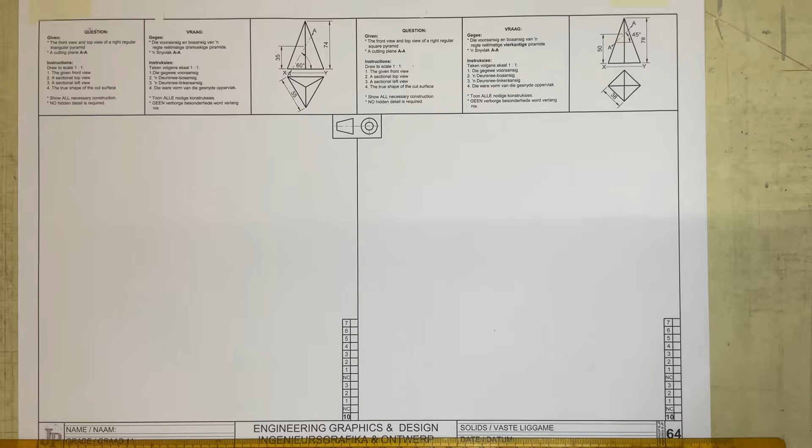All right, we're going to be doing the solid geometry here of this page number 64. What we're going to do is to first of all copy out these two views, and to do that I first of all need to do some planning. It says drawn to scale 1:1.

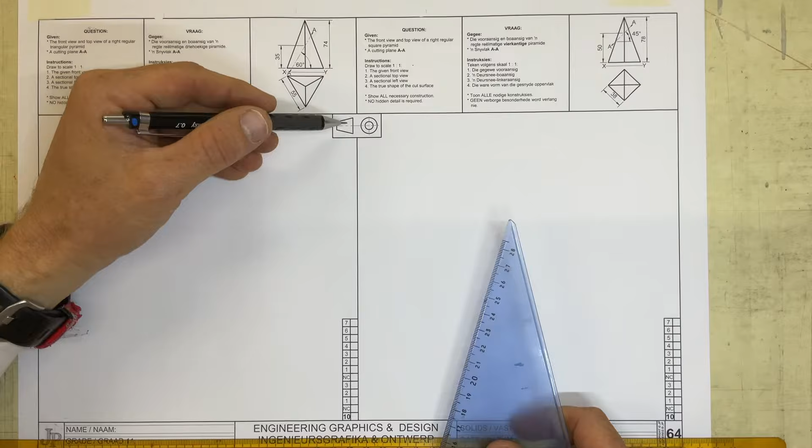I need to draw the given front view, a sectional top view, a sectional left view, and the true shape of the cut surface. All right, it is needing to be done as a first angle orthographic projection. So I need a front view, a top view, space for a left view, and space for a true shape. Right.

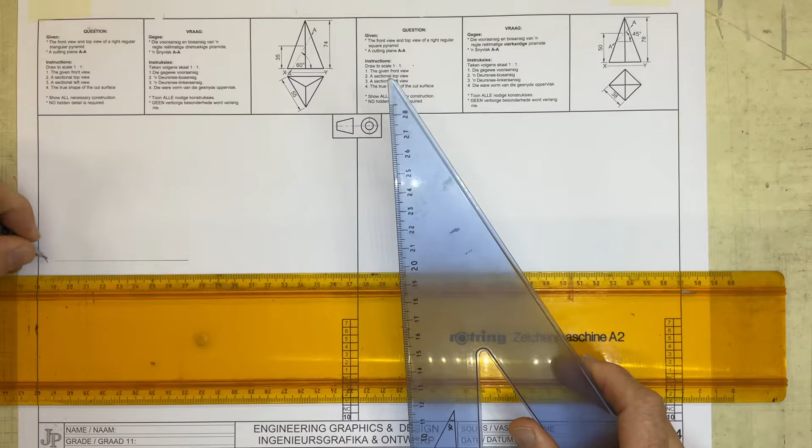Starting over here, I'm going to draw an XY axis over here, just somewhere over here, little XY axis coming across, label it with an X and a Y. I then come in over here about 5-10 millimeters away from there, and I'm going to draw a construction line coming across over there. I'm going to measure off the 55 millimeters. It's an equilateral triangle, so 55 millimeters. Measure that off over here, 55.

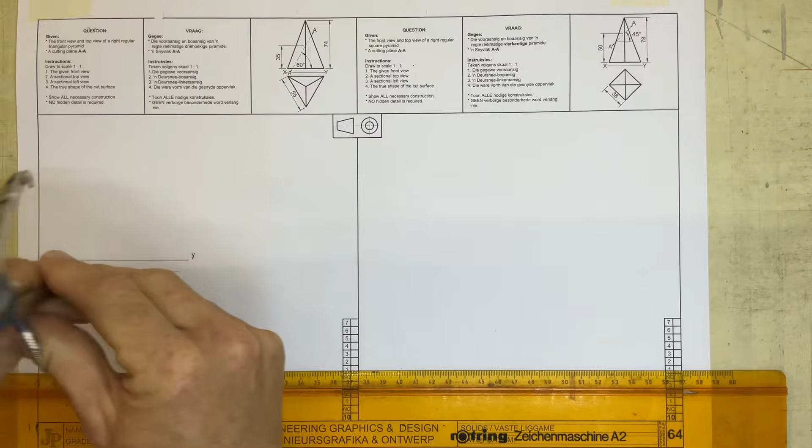I can, if I want to, draw an arc and an arc coming around here, because it'll help me just to locate that point more easily. I can draw in the outside of this thing in construction lines. Please do not draw this in dark straight away, because parts of it are going to be cut away when we do a sectional top view of it. So just in construction lines, I'm using colored pencils to do these construction lines over here.

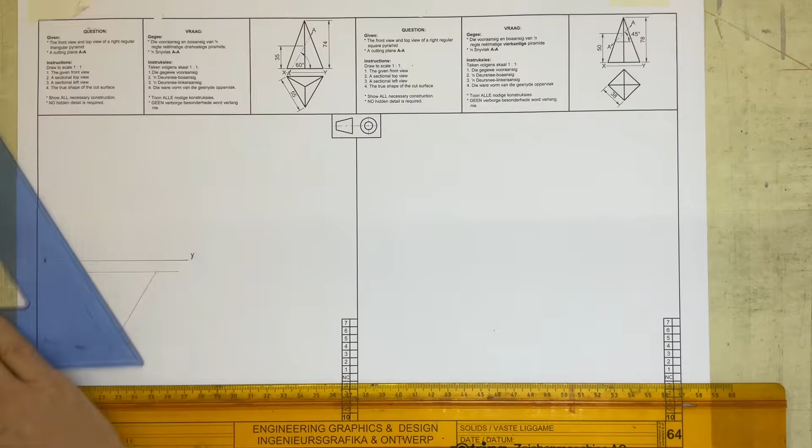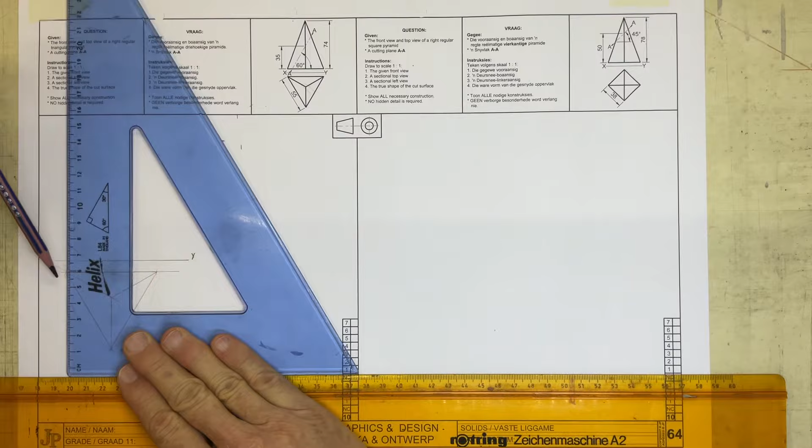Once I've got that, I need to find the apex of this triangular pyramid. I'm going to take a line coming across at 30 degrees over here, take this down at 30 degrees over here, and obviously that 90 degrees going up over there. You take that up into this drawing. I'm just going to use another color over here, taking these lines up into the front view over here, and I can now draw in the base over here, coming across over there, measuring up over here, that's 74 millimeters.

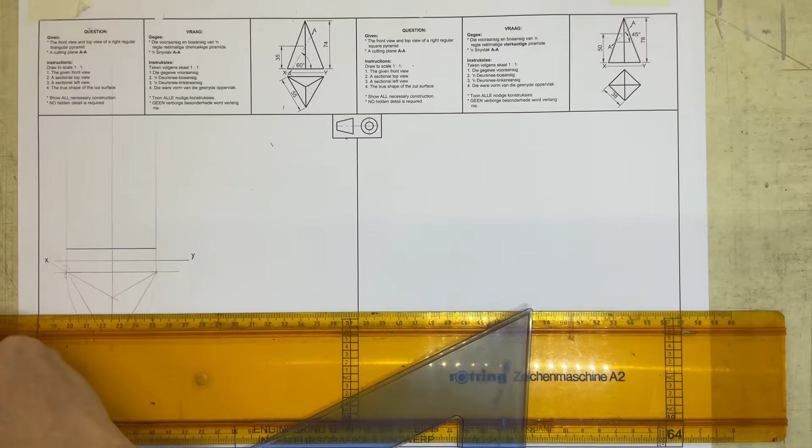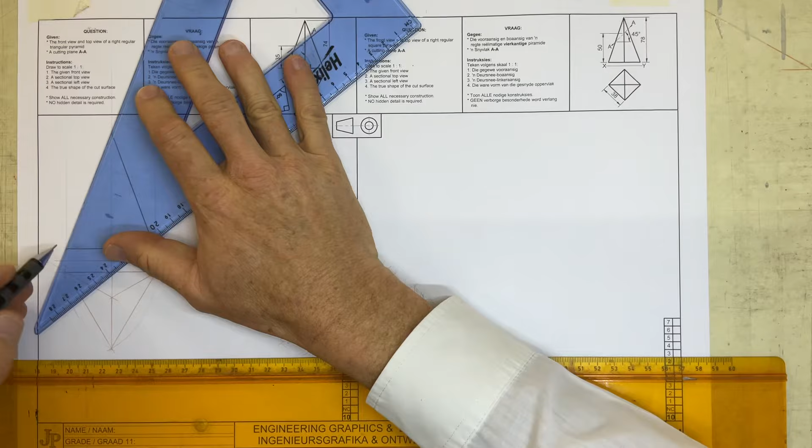Over there, and I can then draw in this thing. They want you to draw the full front view over here, so you don't need to worry about drawing it in construction lines or anything funny like that. Go straight in there, draw these lines dark. All right. Look where you are standing. You are going to be standing over here. You're going to be looking at this line going up, so I can draw that in dark as well. Okay, very important to start looking at where you are actually standing in this drawing.

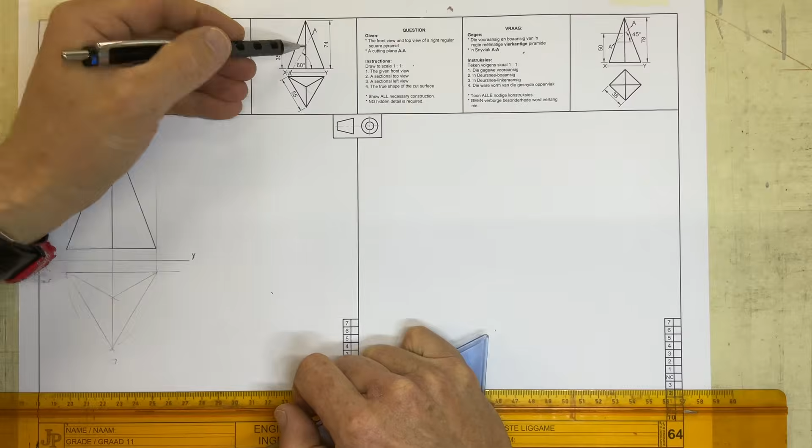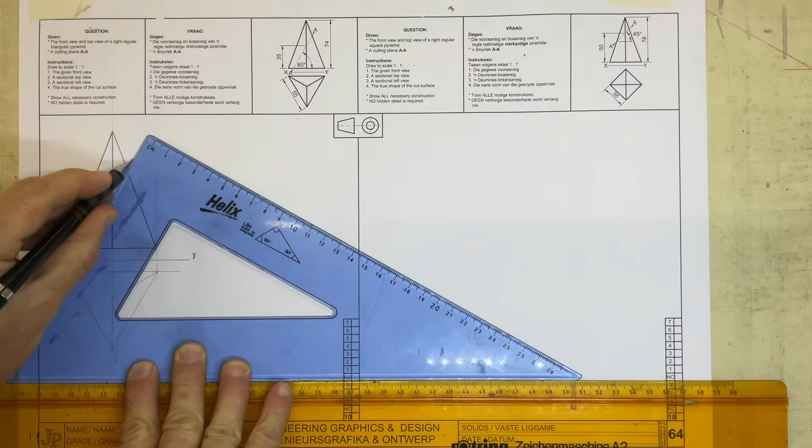Once I've got that, I need to draw in the cutting plane over here, and they say that cutting plane is 35 millimeters going up to that point over there. So I measure up that 35 millimeters, draw that in. Knock that 35 mark in there, and this is done at 60 degrees. Take your 0.3 pencil, long dash, short dash, long dash, short dash, long dash. Take your 0.7 pencil, and you are going to darken that in and darken that in, and you are then going to write A and A over there.

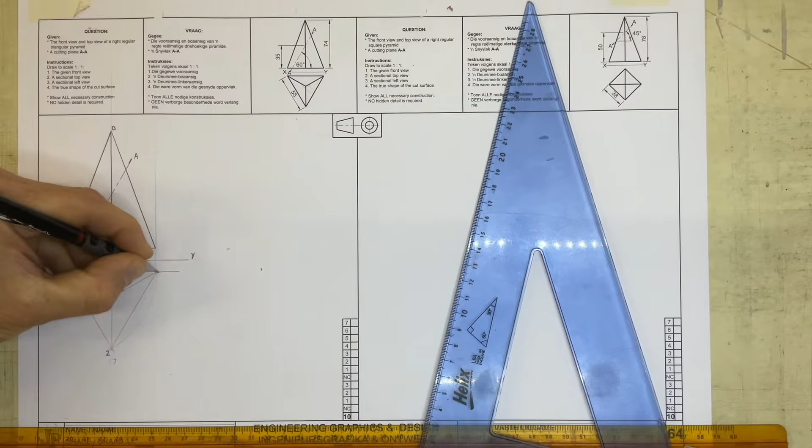Right, the next thing that we're going to do is we are going to look at numbering this thing. I'm going to start over here. I always label the apex of this thing with a 0. Put a 0 at the top over there. You're then going to come over here and go number 1, number 2, number 3. Right. That corner over there is going to be number 1. That corner over there is going to be number 2. That corner over there is going to be number 3.

Right. What we're going to quickly do here is to draw the left view of this thing in construction lines. So to do that, I'm going to take a line coming across over here. Very quickly, take a line coming across over here from that front view. I'm going to draw a line coming down over here at 45 degrees from where I'm wanting this left view to start. So somewhere over there. Let's take that up over there.

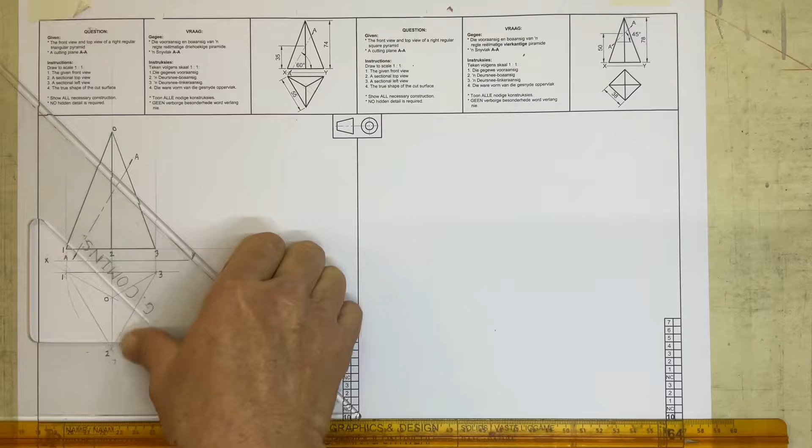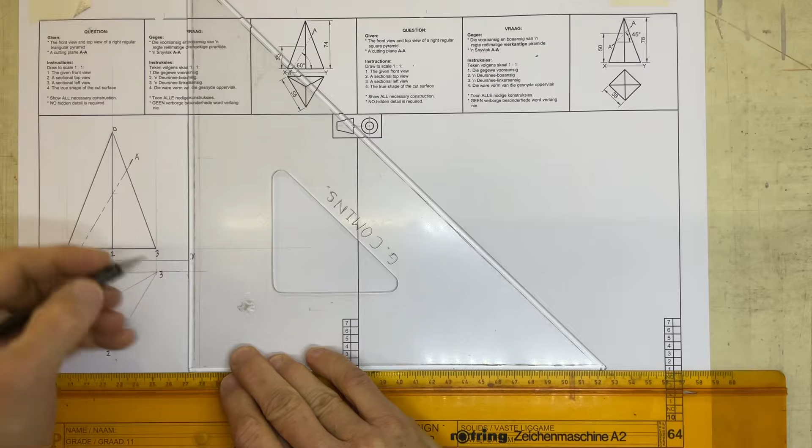All right. Once I've got that in place, I'm going to take a measurement going across from this view over here, and I can take that up over here like that. Where that 45 intersects with the XY axis, I can draw in an XY axis over here, going up over there, and I label that with an X and a Y, and I put a 1 and a 1 over there.

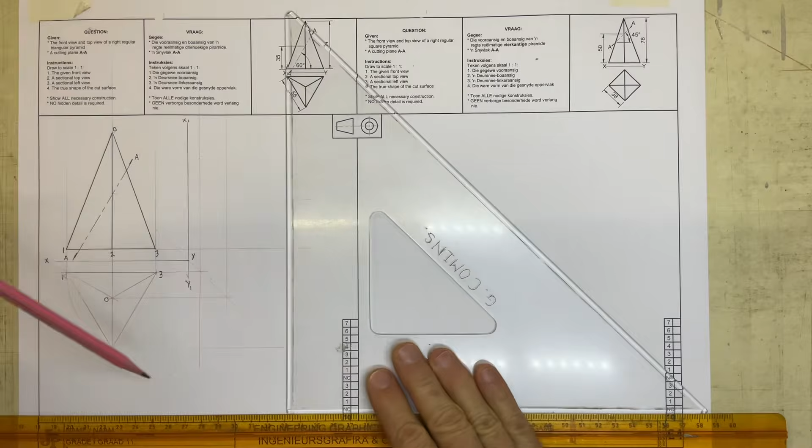Right, once I've got that, I'm going to take these measurements across over here, from there across to the 45 over there, and from the apex across to that, and I take that up into my view over here, like that, and like that. Once I've got that, I'm going to just draw in construction lines. Note, I'm doing this in construction lines, not dark just yet.

A construction line over there, coming across over here, a construction line coming across there, and I can now draw in a construction line going up to there, a construction line going down to there, like that, and that is the surface that I'd be able to see from the left-hand side of this object. I can take these numbers over here. 1 and 3 are on that same line coming up over here.

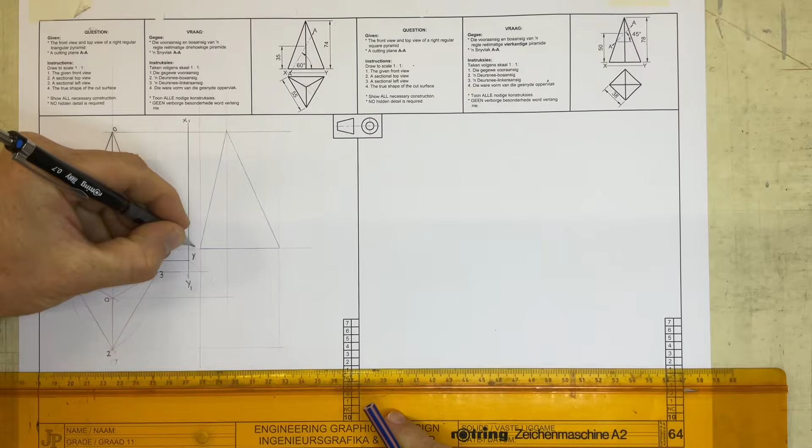This will be number 1 and number 3 on that point. Number 2 coming across and up, there's number 2. Okay, and my 0 is at the top over there. Right, once I've got that, I now start looking at the sectional view of this thing.

You're going to see over here that that section line is cutting through 2 lines. How do I know that I am cutting through 2 lines over here? If you take a line coming down over here, I'm just going to use a different color just to make life easier. Taking a line coming down over there, can you see it is cutting through this point?

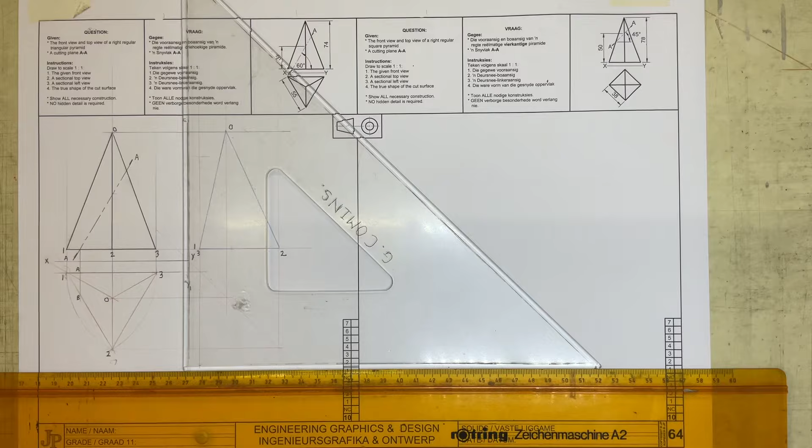I'm going to call this point A over there, and this point over here B. All right, it cuts through line 1, 3, and it cuts through line 1, 2 over there. A is on 1, 3, B is on 1, 2. Okay, let's just transfer that across into my drawing over here.

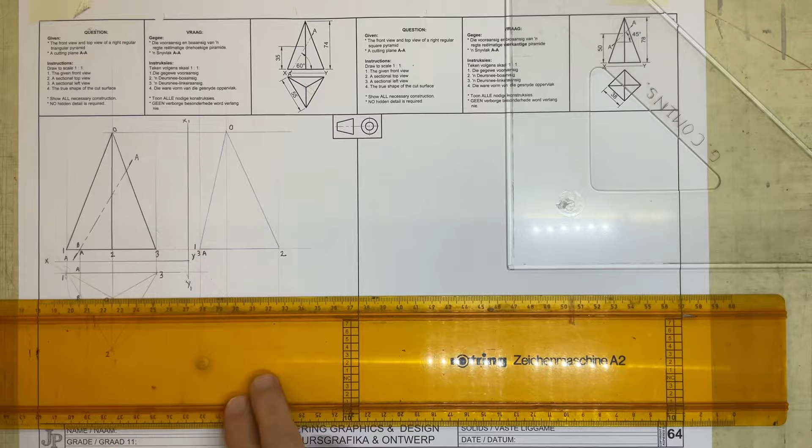So I've got A, point A is coming across, going up here, and I've got a point A over there. Note A over there on the cutting plane. B is on that cutting plane over there, and I'm going to take that across into the drawing. There is B coming across and coming up over here, and there is point B.

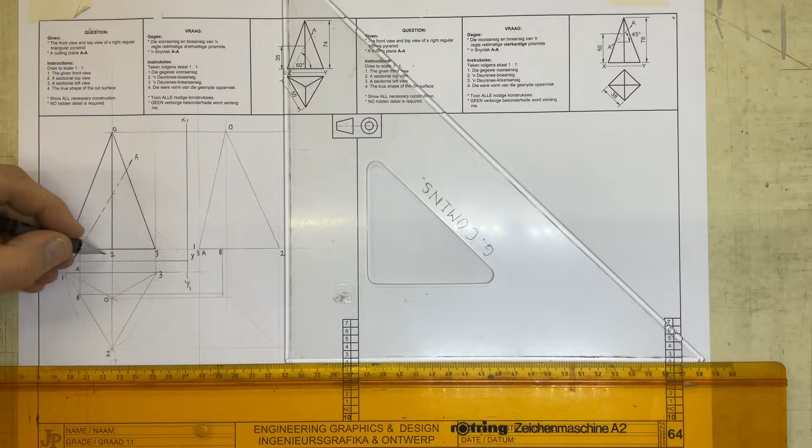Note how B links up with B over here, A links up with A over there, and you can see how that links up over there. Right. This cutting plane is going to be cutting through this line 2, 0 over here. Okay, so I'm going to come along here, and I'm going to draw a line coming across from that cutting point over there. I'm going to call that point C over there. It cuts across, and I can then put a C over here on the left view.

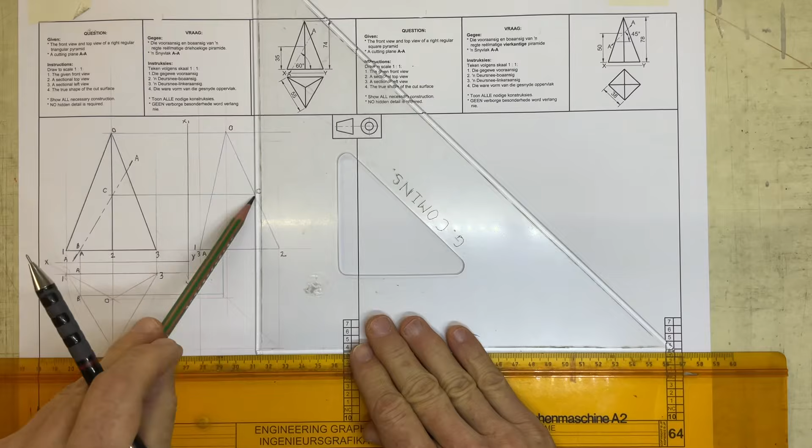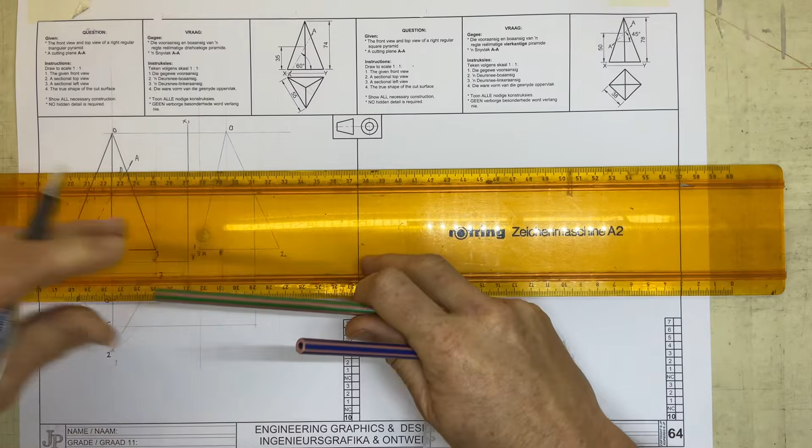I'm going to drop that down over here onto that 45 and take that across over here to link up with the line 2, 0 over there, and I'm going to call that point C over there. Right, it also cuts through this point over here. I'm going to call it D. D is on 3, 0 over there. I'm going to drop that, I'm going to take that across over here. I can take that down to the 45-degree line.

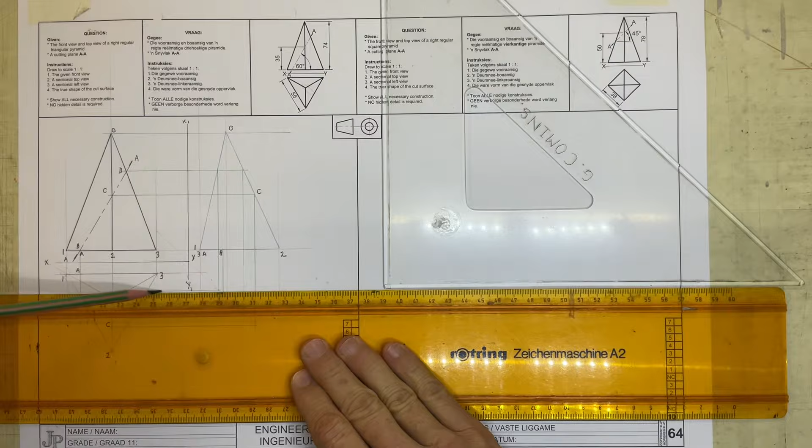I can take that across over here, and it is going to, take it down from 3, 0. Note 3, 0, there, down to 3, 0. Take that across to 3, 0 over there. And if I've drawn accurately, I should find that that links up exactly with that point over there. So this point over here is going to be point D over there. My point D over here.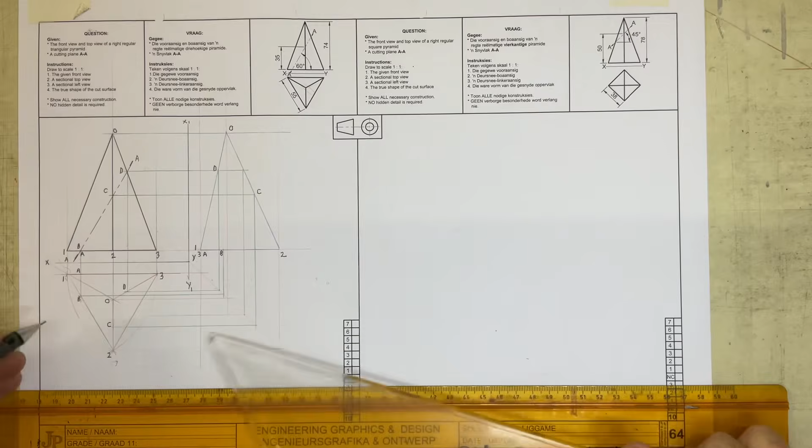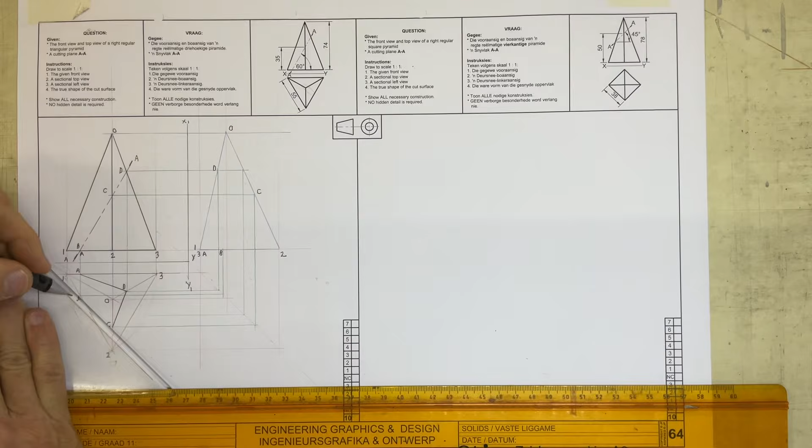All right. And once I've got that, I now have a cutting plane. You'll see that D and A, okay, I've got a cutting plane that goes between A and D. Is there anything between those two? No, there isn't. So a line going from A to D. I've got a line that's going from C to D. I've got a line that is going from B to C. I've got a line that is going straight across from A to B over there.

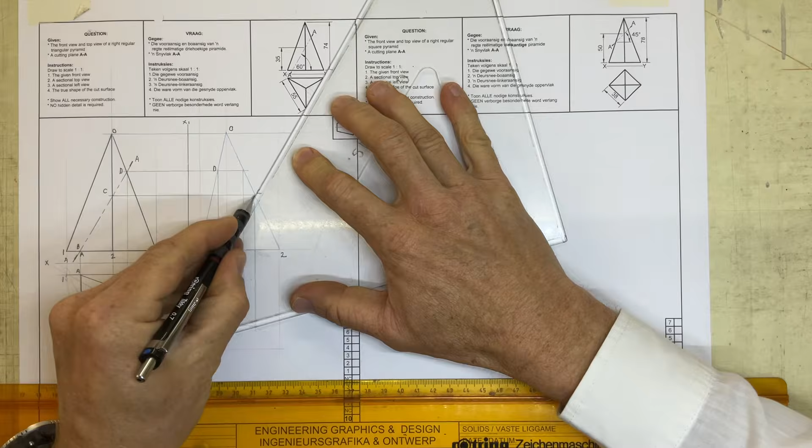All right. I should get exactly the same sort of shape over here. It's obviously going to be a little bit different. I've got a line that goes from A to B over there. I've got a line that goes from B to C over here. I've got a line that goes from C to D over there. And I've got a line that goes from A to D over there.

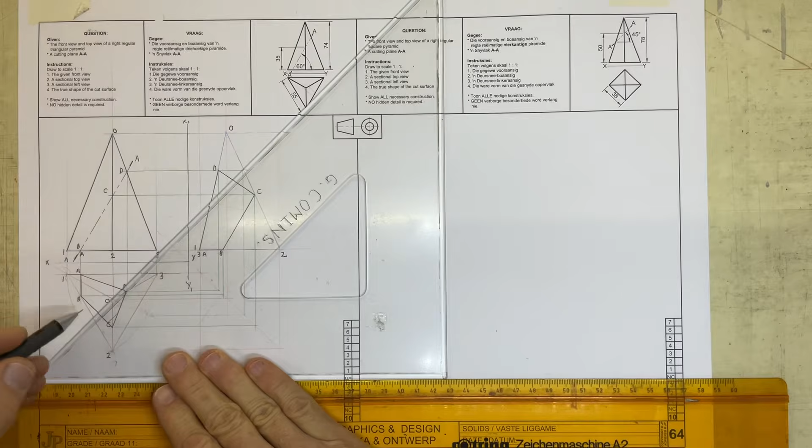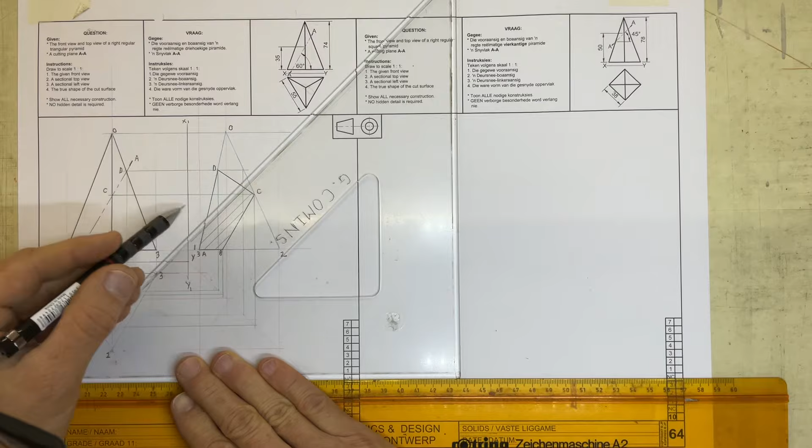Right, once I've got that, what I'm going to do is I'm going to take my 0.3 pencil and I'm going to hatch those areas. Hatch it as fast as you can. You get marks for this hatching, so do it nice and neatly. Come in over here, and we have now hatched that cutting plane beautifully. And then we're going to have a look and see what it is that we can still see after we have cut away stuff.

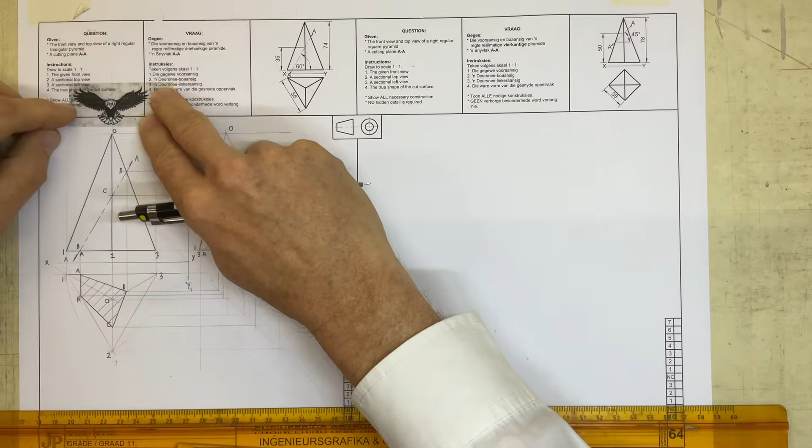Right, there's the cutting plane that I would see. If I'm standing over here, little man, I don't have my little man anymore, damn it. Okay, let's have a look at this. I'm going to do the top view first. There's my little eagle flying down over here, and he can touch that top view. All right, in other words, this top part over here has been removed.

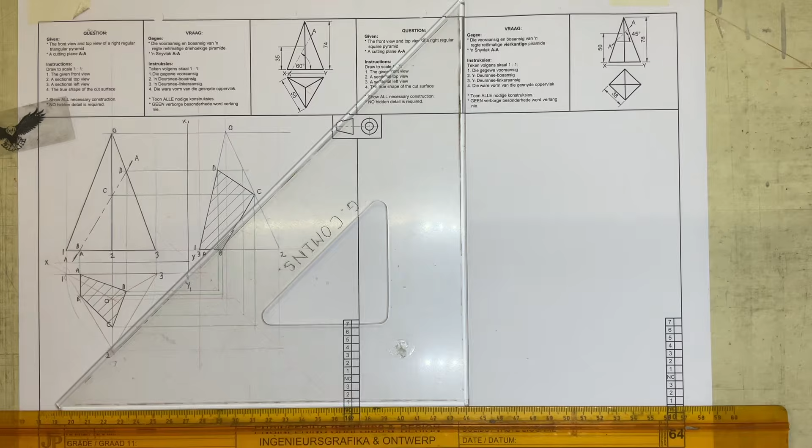If that top part has been removed, I can see the cutting plane, but I can still see all of this bottom part still. So I need to draw that part in, and with that, I can then draw in this line going from 2 to 3. That is still very much in the picture. I can draw in this line going from 3 to A.

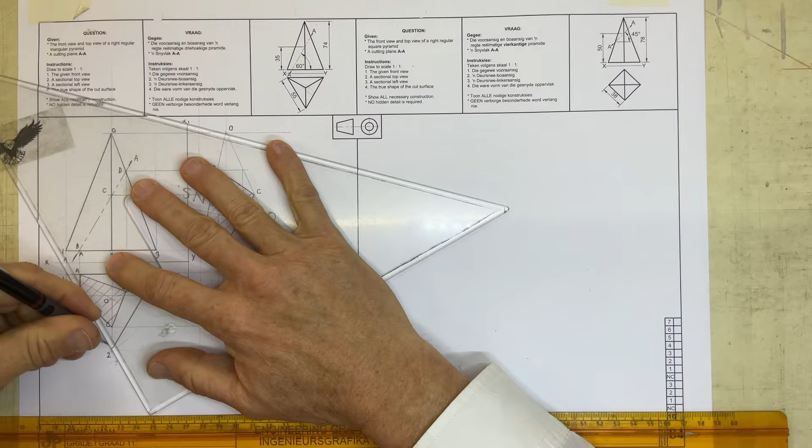3 to A over there. I can draw in this line going from 2 to B over here. And I will be able to draw in this little piece of line going from 2 up to C. There's 2 going up to C. I'll be able to draw in this line going from 3 to D over there. And the rest of it has been cut away, so I don't need to draw anything else on that.

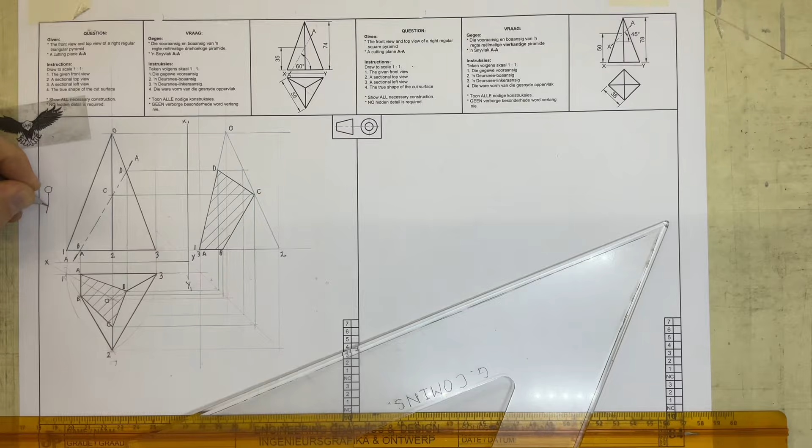Right, if I'm a little man, I'm going to have to draw myself in over here. Little man over there. Okay, looking across, I'm pointing at it. If I move across, I'm going to have to touch the cutting plane over there, which means that this side of this thing has been removed. That's what I'm seeing over there.

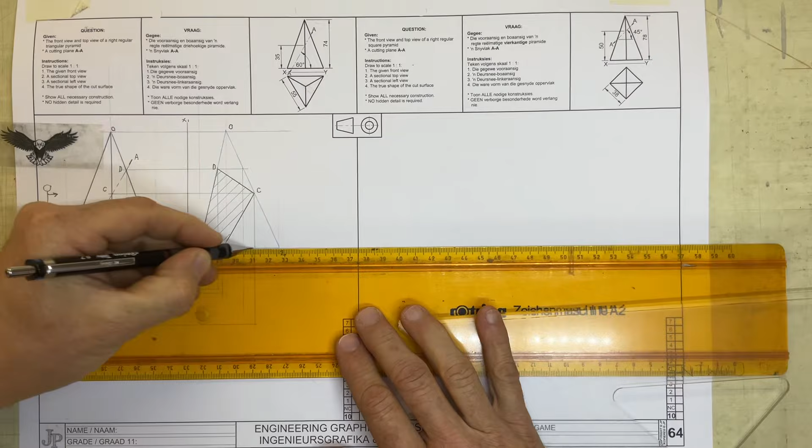But what is left of this thing is this back part over here, which means that I need to draw in a line going across from there to there, a line going from there up to there, and this top part over here has been obliterated. All right, it's not there anymore, so you don't need to draw any more than that. Right, there we go. That is that drawing completed as far as the left view and the top view.

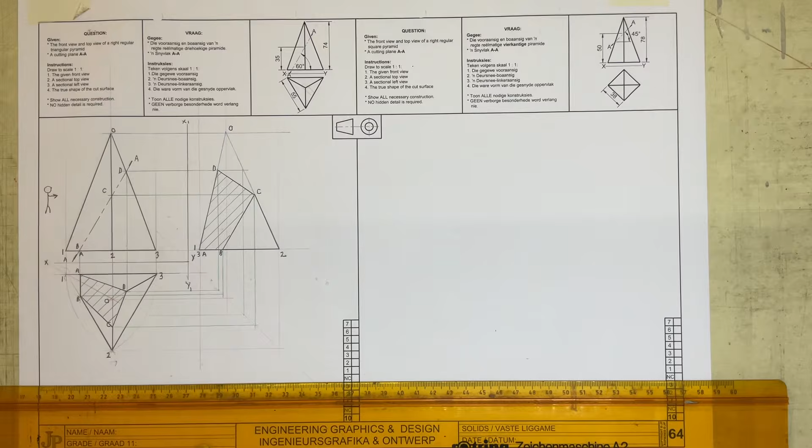They then ask you to do a true shape of the cut surface. Right, my method for doing this works like this. I take my page, I take it off, and I'm going to first of all get my ruler lined up on that cutting plane over there. Right, line it up on the cutting plane. Get your masking tape, which you all have because you've been doing the helixes lately, and you should be using it to figure out your helixes.

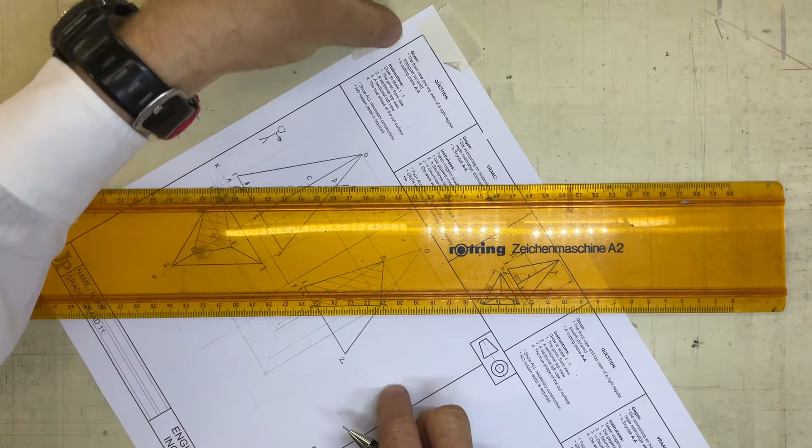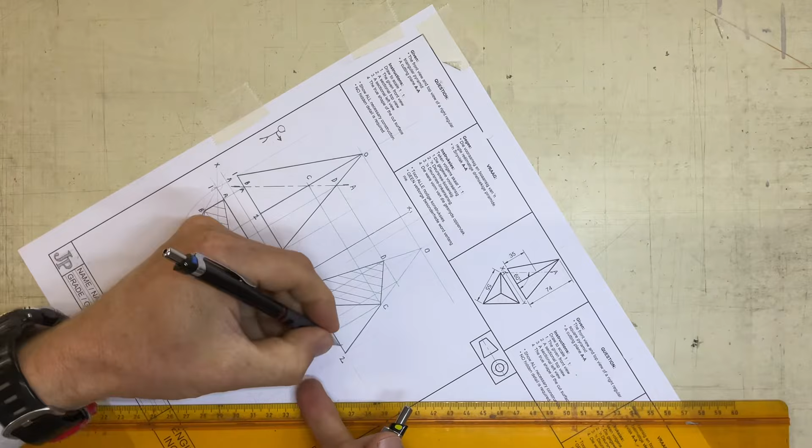So there we go, masking tape, stick that down. Move this down over here to about that point. And I'm going to draw in an XY axis. XY axis coming across over there. I'm going to label it with an X and a Y. Okay. And from that, I can then take lines coming down over here. Just some construction lines coming down from A and B, from C, and from D over there.

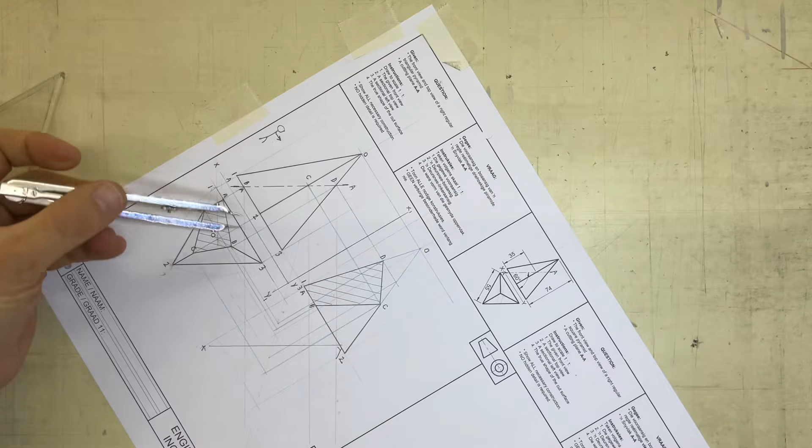Right. Okay, once I've got those measurements, I then come in over here and I say the distance from the XY axis to A is the same distance as the XY axis to the A. And if I take this point from A coming down to this XY axis, guess what? It's going to be the same distance over there to that point A. There is point A on my true shape.

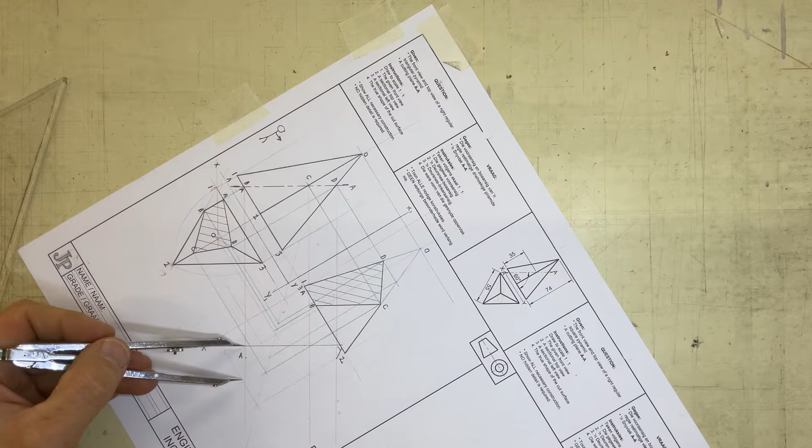I'm then going to say, all right, what is the true length distance, or the distance from the XY axis to B over there? I find B over here. If I come across here, look at that. That distance over there is the same. Coming down over here, guess what? It's going to be the same on this view as well. So the distance from the XY axis to B, it's the same in that view, in that view, and in that view. Note, I'm never taking a measurement from this view over here. I'm always taking it either off this view over here or I could take it off that view over there, okay, to bring it down into this true shape story.

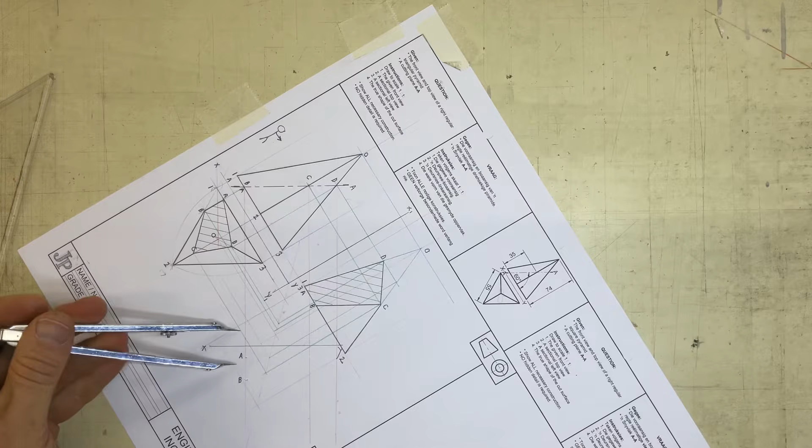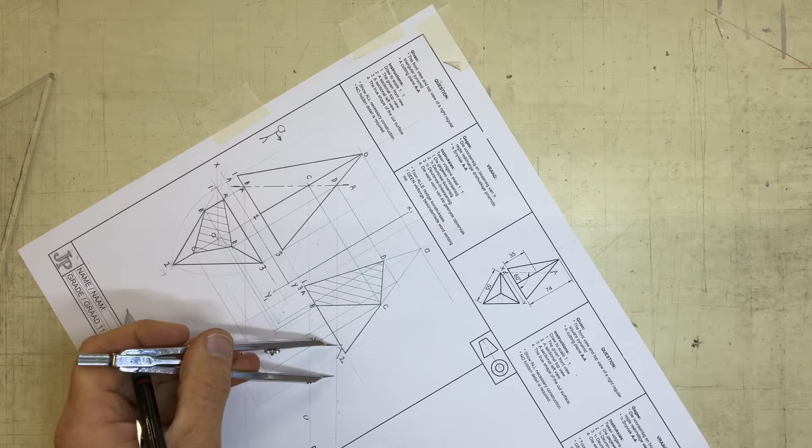Right, going over here, distance from XY axis to C, find C, bring it down over here, mark it off. There is point C over there. Distance from XY axis to D, find D, bring it down into the drawing, mark it off. There is my D over there. And I can now link those points up. Nice dark lines going from D to C.

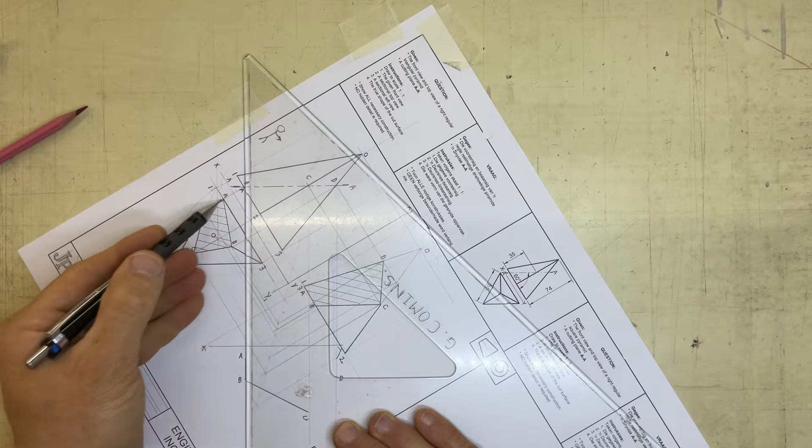Note this, A and B, if you look at this, A and B are at 90 degrees to the XY axis. Note over here, A and B are 90 degrees to the XY axis. If you look over here, A and B are 90 degrees to the XY axis. All right, if I come over here, I need to take this measurement from C to D, and from D to A over there. And then I'm going to hatch that over here with my 60-degree set square as fast as I can. Whoops, keeps on breaking for some reason.

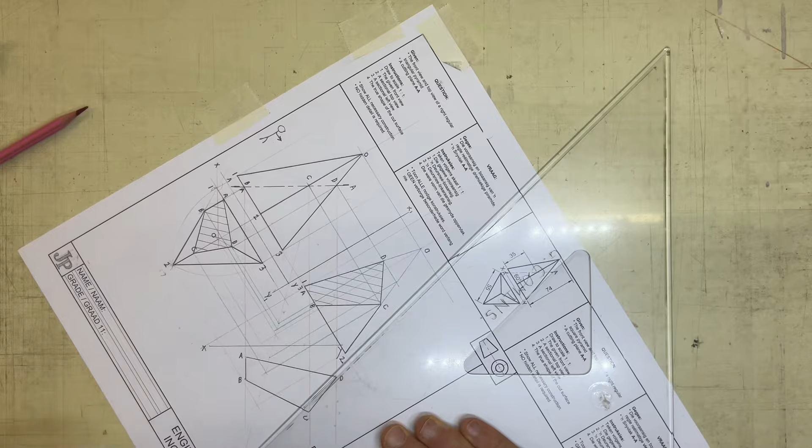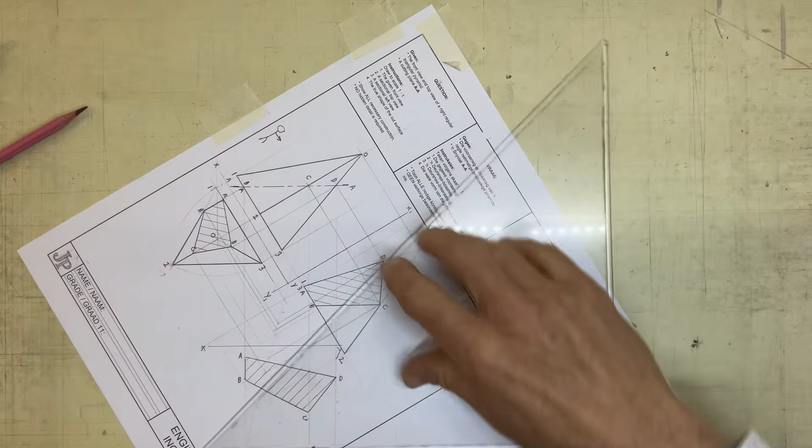Right, hatch this as fast as you can with your 0.3 pencil. Work accurately with this. I don't want to see your hatching going over the lines. So go fast, slow down, stop. Okay, right, I made two of them go over, but once I've done that, I'm going to turn this drawing around. So take it off like that, turn it around, and as soon as I've done that, I'm going to then draw in two little construction lines over here.

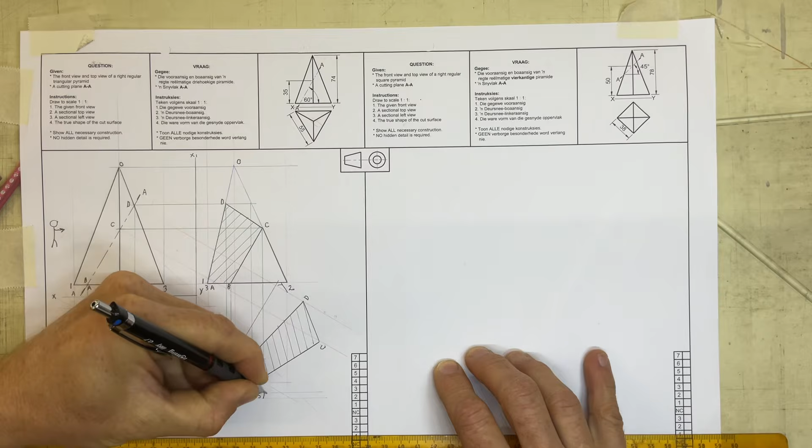And I need to write in true shape. T, R, U, E, shape. S, H, A, P, E. Right. Why is it a true shape? Well, if you look at it, if I look at these measurements over here, that length over there is not a true length. That length over there is not a true length. That length over there is not a true length.

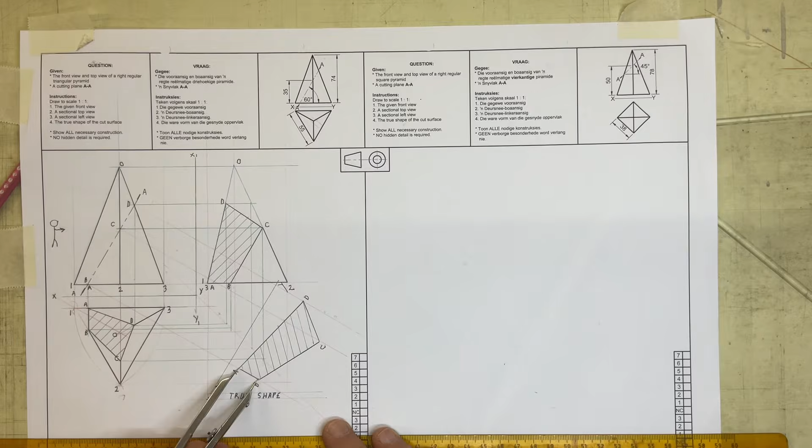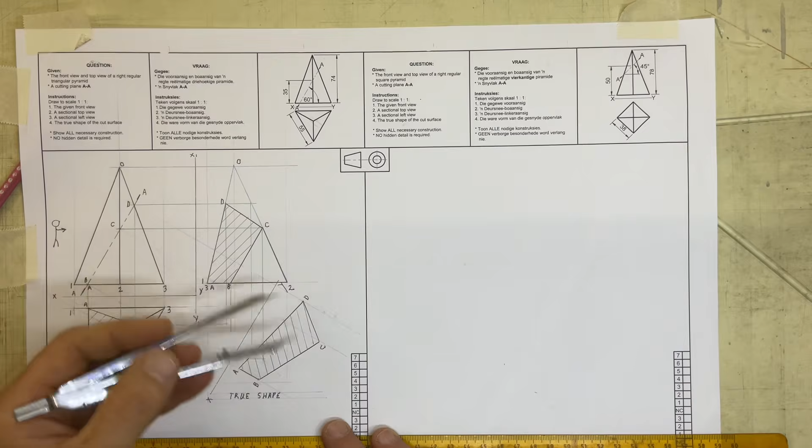Okay, the only true length that I will actually have on this will be this line over here, and the reason being is that I've got a point view of AB, and you'll see that that true length is transferred over there, but you'll see over here, these lengths over here are the true lengths, and you'll see that they will be much longer than the lengths that you have on these other views over here. CD, you can see over there, it's going to be a little bit shorter on all these other views. Right, there we go. True shape, left sectional view, sectional top view, and that's the drawing complete.